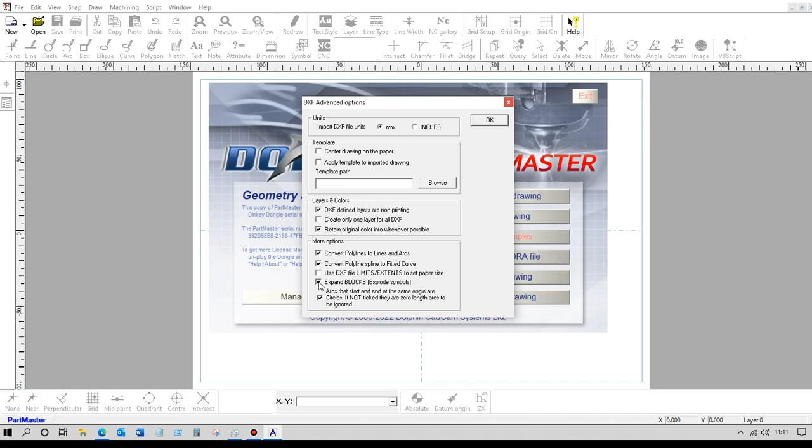When you import DXF files, it's good to make sure that these boxes are checked, because we don't want polylines. We want to convert them to lines and arcs, and we want to expand any blocks. The units we're working in are millimeters.

Okay, so that's imported the first DXF file. Now what we can't do is import two DXF files onto the same drawing, so we have to do them separately and then copy and paste them in. So if we import the next drawing...

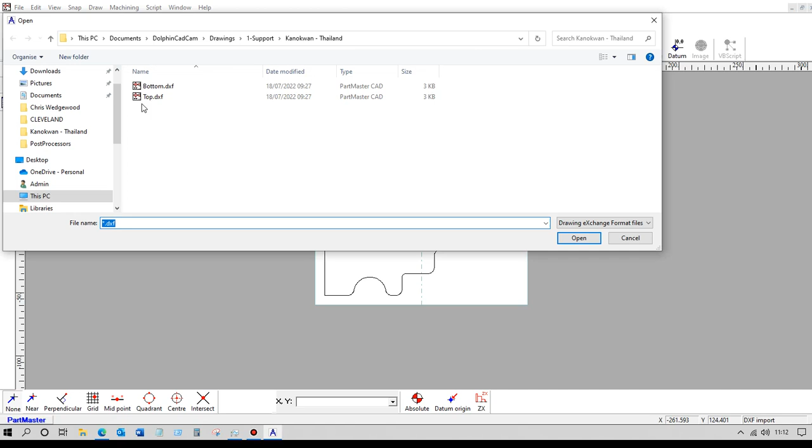This one will be the top, and all these settings remain the same. Okay, so this is the second DXF drawing.

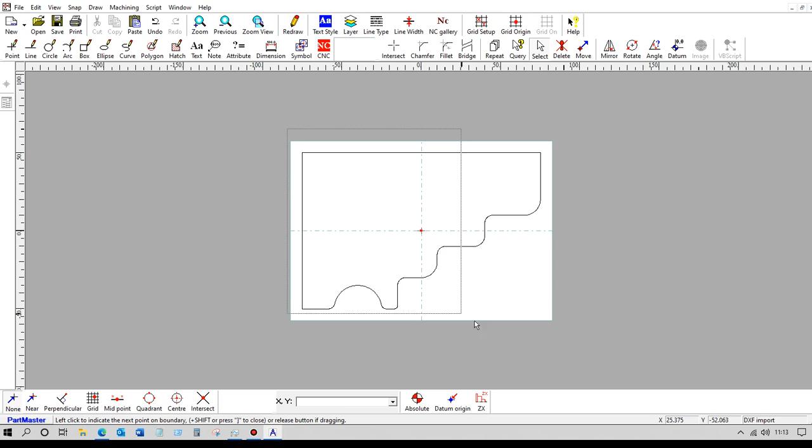Now, because I'm going to be positioning this geometry onto another drawing, I need to create a point. So I go into point, select near, and lock on to the datum position here. I need to do that so that when I come to create the contours, each contour can have the same datum point. So now I simply select that geometry and copy it, then go back to my original drawing.

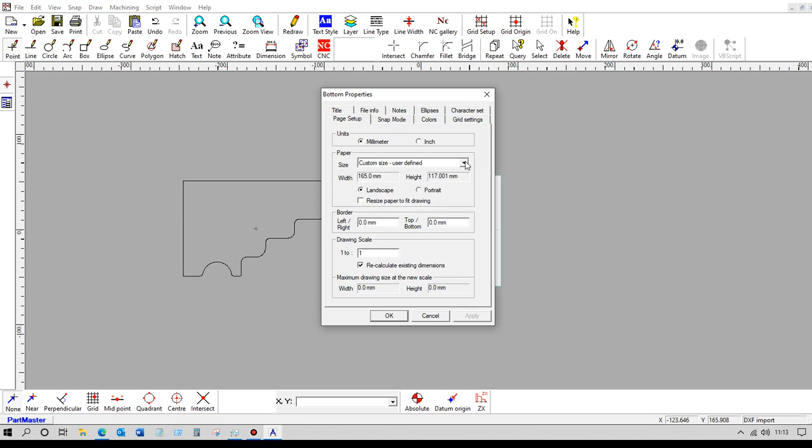And say paste, and we'll just paste it. It doesn't matter whereabouts this is. Okay, so now if we wanted to, we can view the properties and choose a bigger paper size. So we've got those two shapes there.

So now we need to create contours of each one. They don't have to be coincident on top of each other, and in a lot of cases it's better that they are separate, because you can see things more clearly.

So the way that we create the contours is we go into CNC mode, and you'll notice the first one has its datum position in the original position here, which is what we want. So now we go into create a contour, and we'll lock on to this top line here, and we'll call this contour...

Bottom. So that's created that contour.

Now we can change our datum position to the point that we created previously. So that's the datum for this contour, which has the same start point here, but this contour will be called top.

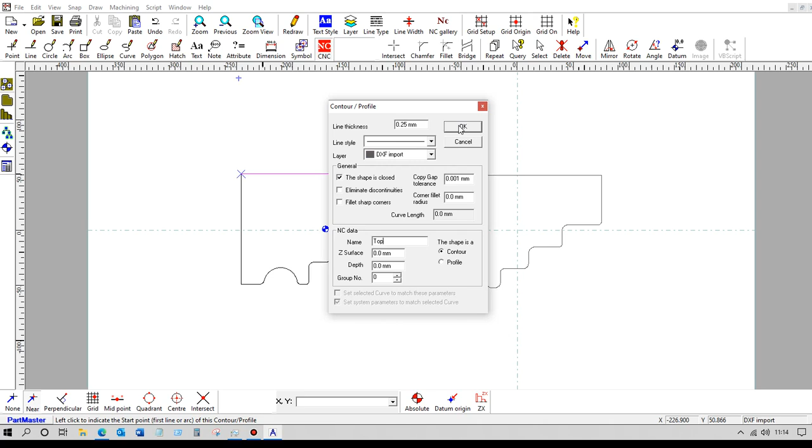So we have two contours there. Each one has its own datum, but the system will make them coincident when we go into the EDM software. So let's save that away.

So now we go into machining for the Wire EDM module. As you can see, it's created those two contours and used the datum position to make them coincident. What the software will do is when it sees contours within the drawings that have been created, it will create a 2-axis program for them, but we don't want that, so we can just switch those off.

What we want to do is create a 4-axis job. So we choose the 4-axis tab here, and we choose which contour we want. The XY contour will be this one, and the UV contour will be that one, and we named them as we wanted to.

We can set up the distance between them, say 20 millimeters, and under the options tab here, if we start machining here, it'll consider this first span as part of its approach movement and apply all its offsets to that. So what we may want to do is create a start hole position.

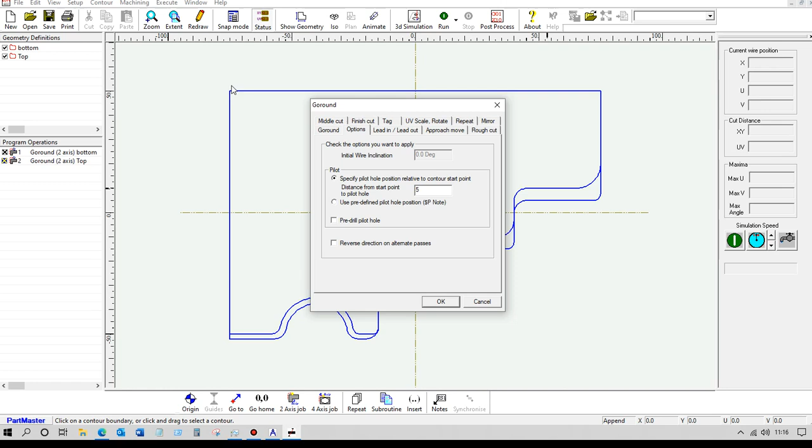In this case, 5 millimeters away from that, and then the lead-in, lead-out from that start hole onto the contour can be linear, or it can be linear plus arc, and if we set the radius, the same thing applies at the runoff, the lead-out.

So going here, we set the direction of cut and we set the offset. So if you're cutting around the outside of that, the offset would be to the left. And there are other features that we can use here for rough finishing and middle cutting.

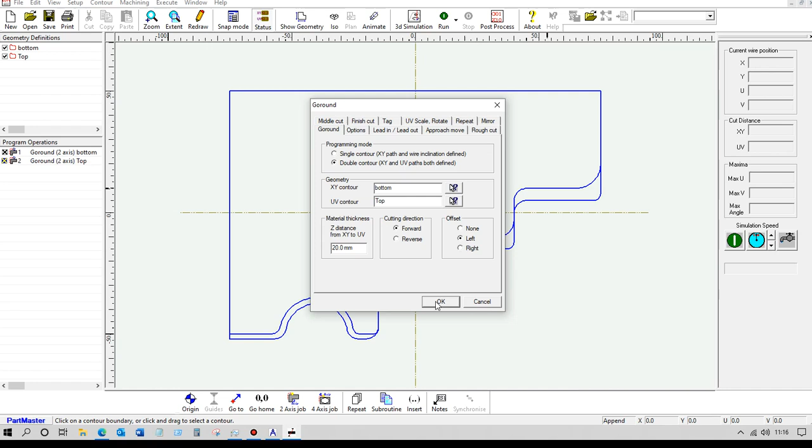So in its normal format, what that does is it creates a program for that shape there. It creates a rapid movement from here out to the start point, puts an arc approach on, machines all the way around, and then when it gets to the end, it puts an arc lead-out on.

If we want to animate the wire, we can do. So that's now running along the top here, as you can see. And it may or may not be that those synchronized points are where you expect them to be. If they're not, then we can add in extra points.

Okay, so in the right hand corner here we have the maximum cut distance and the maximum angle and deviation on that program. So now if we want to add on synchronization points, we go to synchronize.

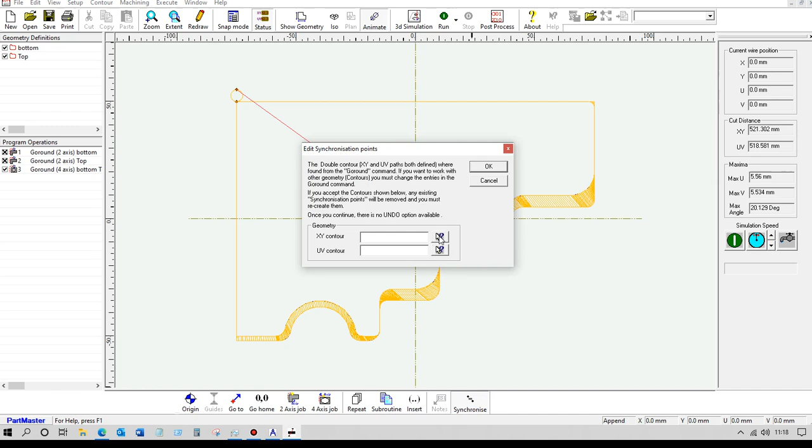The XY contour is that one and the UV contour is that one, and now we can add the synchronization points that we want. So this will be forcing the wire to synchronize at these positions.

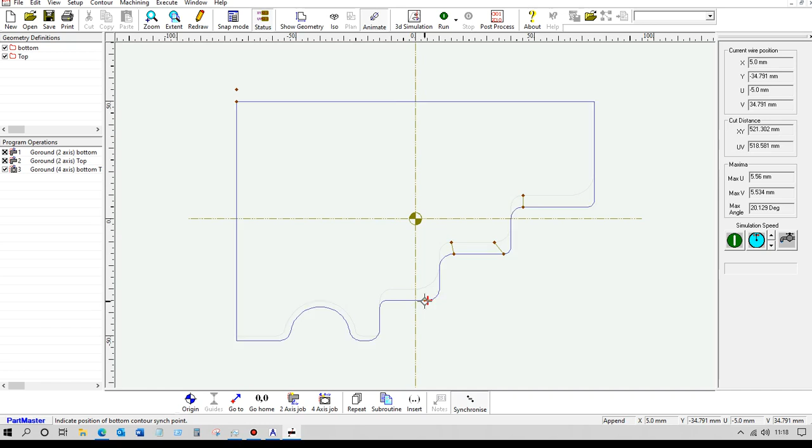So what it does is, as I'm choosing the synchronization points from each contour, it highlights that contour so it's easier for me to choose the synchronization points. And when we're happy that we've got enough of those, we simply click run.

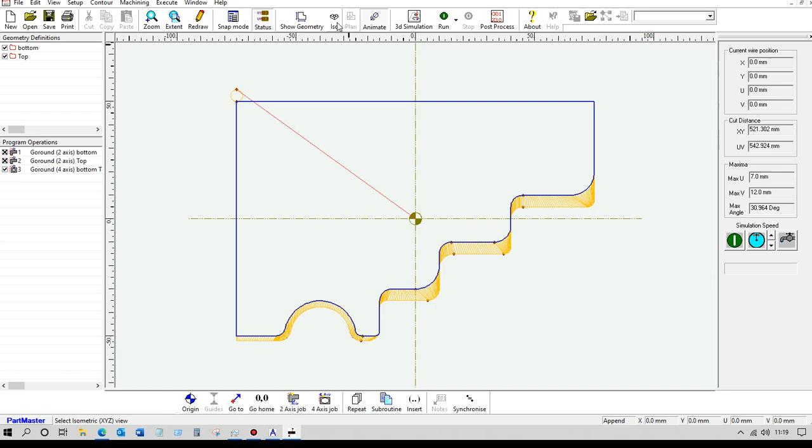Okay, so that's produced that program. We can look at it in the isometric view and see it. We can post-process that for the required machine tool, or we can run the 3D simulation.

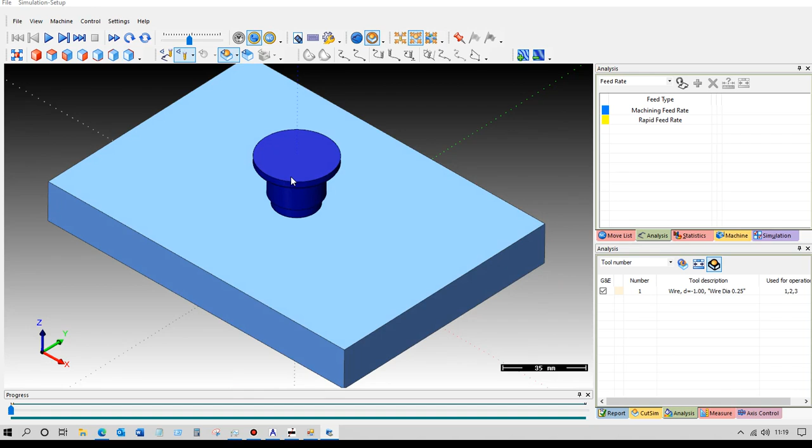So for the 3D simulation, we can leave all the defaults as they are, and we simply click on Simulate. So this is showing us the part plus the nozzle at the top.

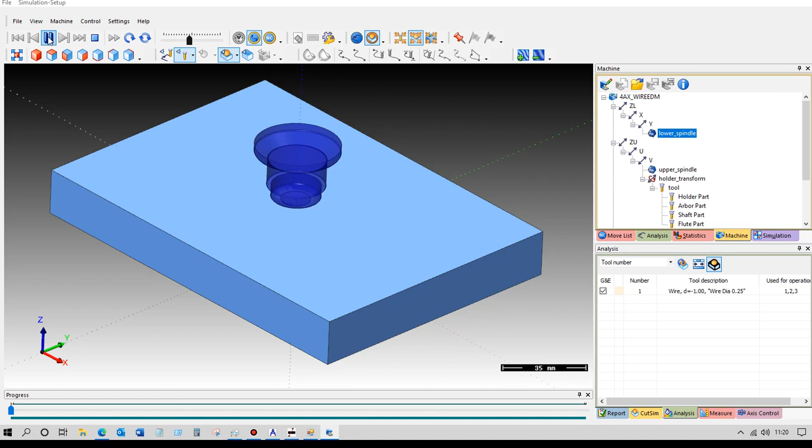If we want to, we can make the upper spindle transparent, and we can make the lower spindle transparent as well, so we can see that. The video controls across the top here control the animation. So that's the rapid movement.

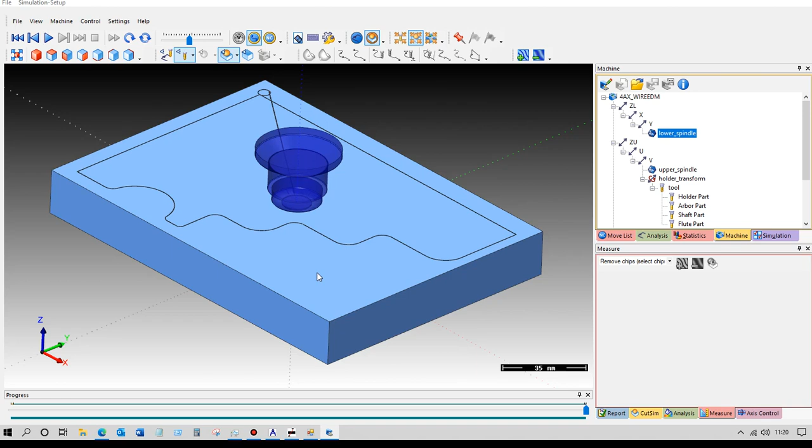Okay, if we go down to the measure button here and select remove chips, press down on the mouse wheel, and that will get rid of the outside stock and just show us the part as we have machined it there.

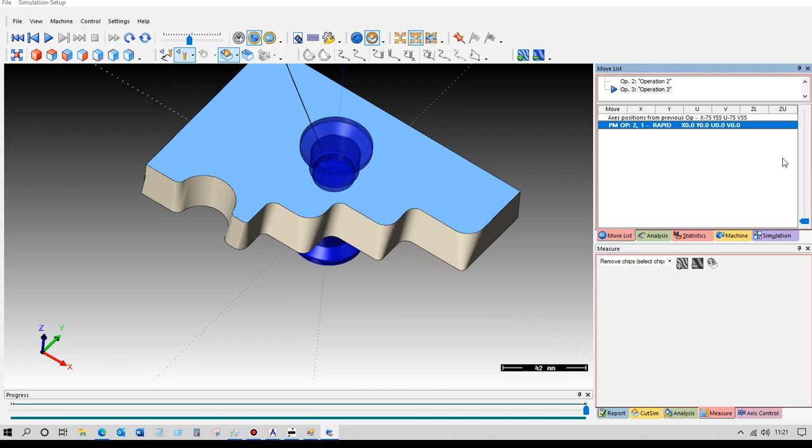Under the move list, you can run the wire back all the way around there, so you can see exactly what is happening there.

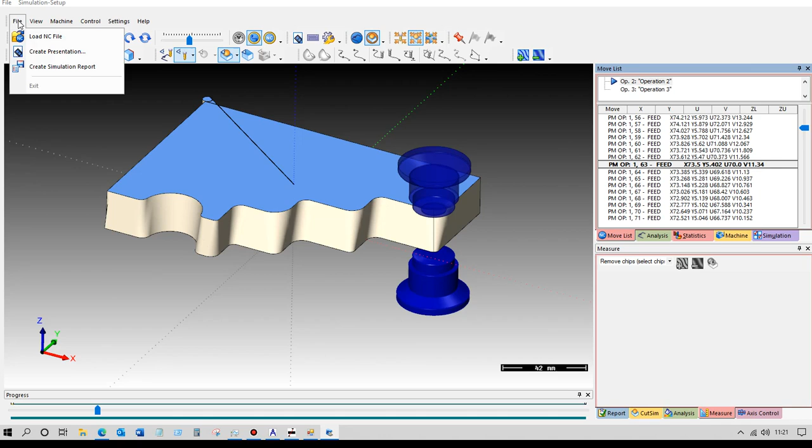Okay, so that's the verification that we can see there, and that looks just like what we want it to machine. So we can go File, File, Exit.

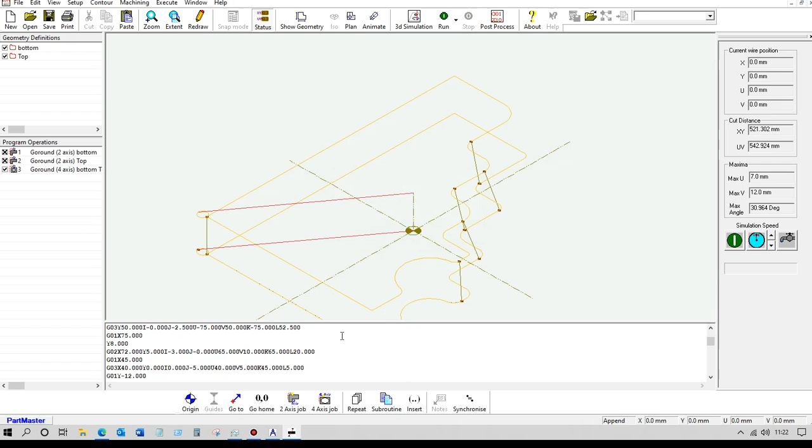And then we can post-process that to the required machine tool. Let's choose a standard FANUC, but we have a range of different machine tools. And what then happens is that a G-code file is produced for you at the bottom of the screen here.